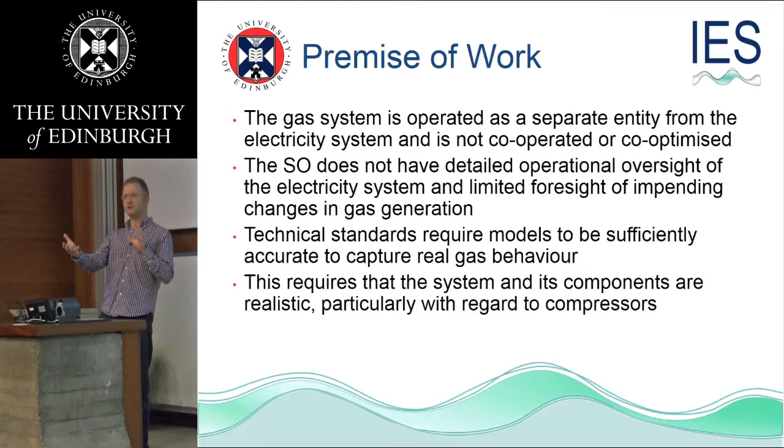And one of the interesting bits about that is, rather than modelling, say, a compressor, which is key to that, as a simple pressure raising device, you have to model the whole compressor. Okay, so that involves the various flow rate constraints, surge and choke. So there's some mechanical engineers going, I've heard of that. So it's a mechanical system. And so you need all of that information in your model.

And another aspect of this is that gas systems have quite a slow time constant. Electricity systems, it's almost instantaneous. In gas, it takes time to physically move the gas from one end of a pipe to another. So there's quite a slow pattern to this. So the way that the gas companies operate their system is they employ something called transient analysis, which actually factors in the full mechanical flows of gas down the line.

So it takes in momentum, energy, mass transfer. And that's a pretty challenging thing. In addition, one of the advantages of the gas system is you have some inbuilt storage in the form of line pack, and that's basically an ability to squeeze a bit more gas into the pipe than you normally would and then draw it down a bit. So it basically gives you a buffer, a pressure buffer to swing between, and that's used extensively in operation.

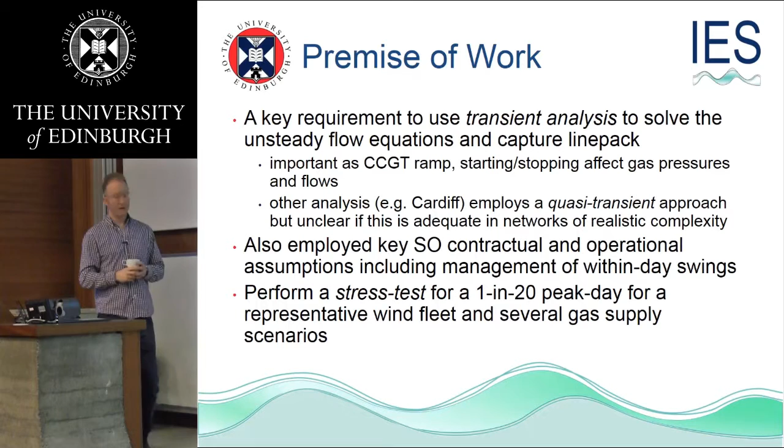And the reason the transient analysis is important is because if you're talking about a system where you're ramping generation up and down in response to wind, then you're actually talking about potentially quite big swings in gas flows and gas pressures during the day in response to wind.

Now, some other work, particularly in Cardiff, has had a sort of quasi-transient, so essentially a series of steady-state models which they claim do this. I've never actually seen any analysis to see whether that's actually true. So there's still, I think, an assertion about whether that's realistic. Certainly, in terms of realistic complexity, I don't think, other than National Grid, anybody has ever tried to do this at the scale that we did.

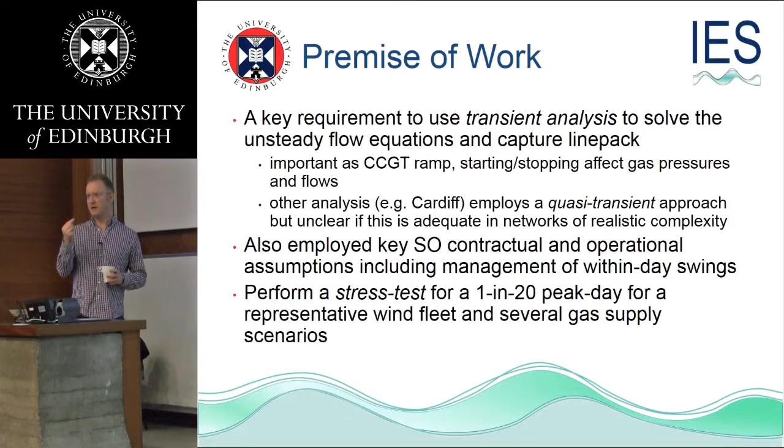So one of the bits of the analysis as well, we were very interested in the contractual arrangements that the system operator has, and a lot of that is about defined pressures in the gas system that they must maintain. So the way that James thought about doing this was, he was very interested in the peak stress days. So that's the very cold days, probably like today, where you've got relatively still, very cold temperatures, high heating demand.

Well, that doesn't apply here.

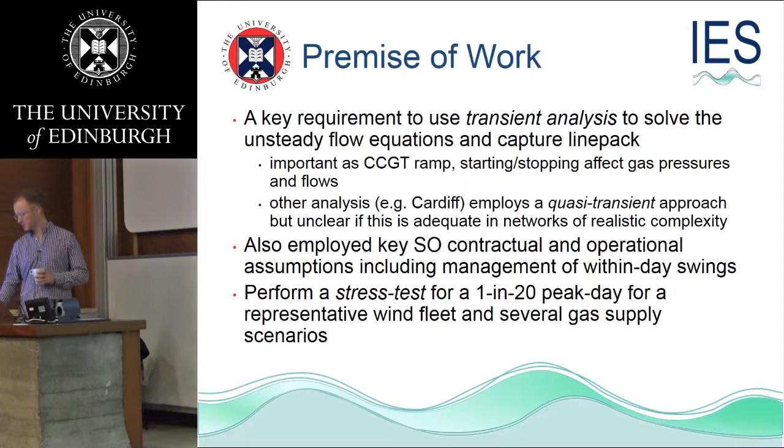And then looking at, in those high demand days, what does wind do to the system? So there are a series of different scenarios of supply applied, and then a series of bits of analysis carried out on each of those. So the working principle here is that, fundamentally, the gas system operator cannot anticipate a change in CCGT operation as a result of wind. And its working assumption is that the demand for the day is flat. Okay? And in practice, it's not, but that's how it's done.

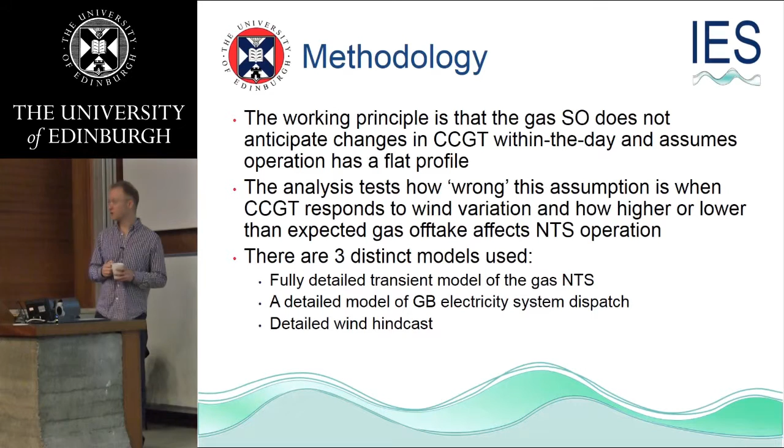So what this analysis did was test just how wrong that assumption was, and also whether or not the response of CCGT to wind would result in higher or lower off-takes of gas and higher or lower pressures. So to actually figure that out, there were a range of different models applied, and there was a fully detailed transient model of the national transmission system, a relatively detailed model of the British electricity system, and then a detailed wind hindcast applied in a sequence. So I'll pick up a little bit about those.

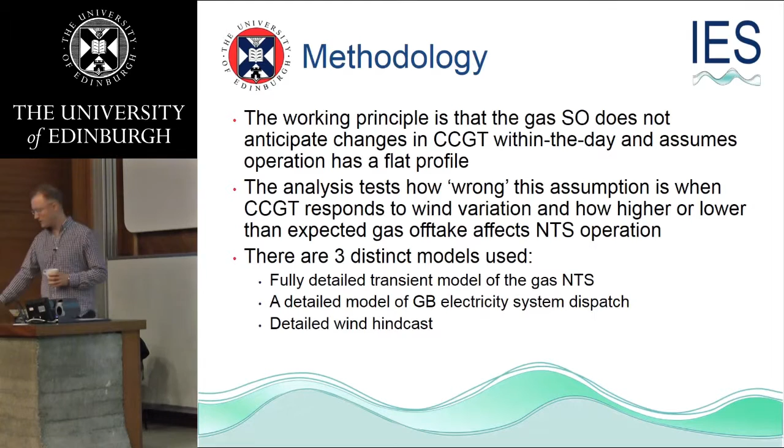So the first bit I'll pick up is the wind model, and that comes out of the work of Sam Hawkins, and that model is available for anybody to use should they wish. And it's a relatively long 11-year time series, down to about 3 kilometres on an hourly basis, and it does a reasonably good job at simulating both wind speeds and the wider fleet. Relatively low bias on that. So with this particular example, there was a fleet of something like 13 gigawatts onshore and 19 offshore. So something like 32 gigawatts overall. So it's a pretty big wind installation, substantially bigger than today.

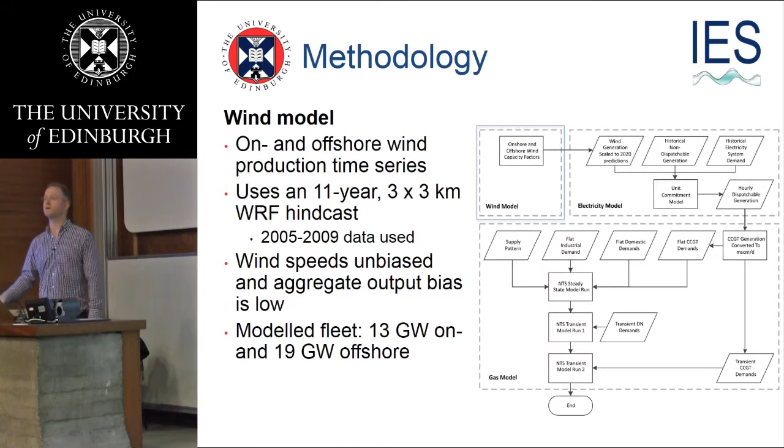So the idea here was that you had a wind model, an electricity model, and then a gas model. So the wind model basically sets a series of boundary conditions for the electricity model, and the electricity model essentially dispatches the system as it sees fit. And it uses something called a unit commitment model, so it tries to do it efficiently and as cheaply as possible, but it also tries to capture the requirements for generation to be up for a certain amount of time, down for a certain amount of time, and their ability to ramp between different states.

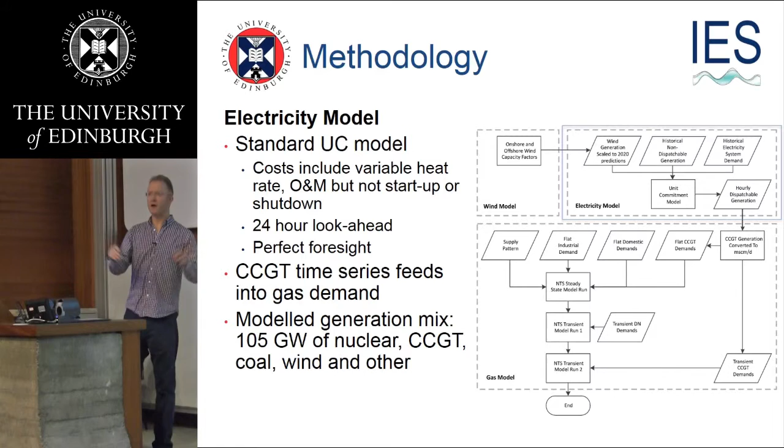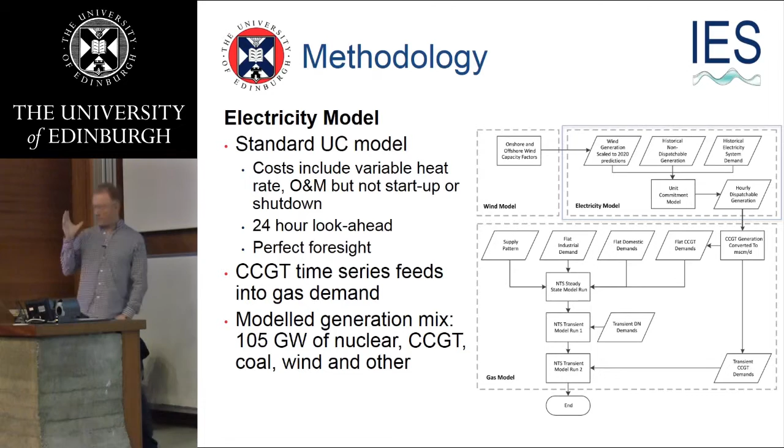So it's reasonably realistic. It had a rolling profile, so it looked 24 hours ahead, and it assumed that the dispatch was perfect. Okay, it had perfect knowledge. And that translates into a dispatch pattern for each CCGT, and that then sets its gas demand for the day. And that was in a context of quite a large mixed fleet of renewables, nuclear, gas and coal. And that basically sets the boundary conditions for the gas system.

And here's a bit of colour, here's a picture, which is great. So this is a very big system. Most of the models you see in literature are talking about 30 nodes. Okay, this one is 800 nodes, so it's 10 times larger and many, many times more complex. It also contains a whole range of things in addition to pipes.

Regulators, which basically will control flows or pressure, a set of valves which give you on-off, and also quite a large number of compressors. So this is a pretty challenging problem to solve even at the base level. And the software that we used was something called Graphical Falcon, which was National Grid's then default package. It's still used by a number of the distribution companies.

The problem with it is it requires manual operation. So there's no automation, there's no optimization, and it's somebody sitting there and figuring out how to get gas from here, here, and here to there, and there. Okay, so it's pretty challenging to use, and highly iterative, takes quite a long time, and it's quite skilled. So, the aim here, and certainly by the time that James was doing this analysis, he was working for National Grid, so he was reasonably skilled at using it. So I think it approximates what the system operator would do in those circumstances.

So the sort of things that you were having to deal with there were high and low pressures, intakes and offtakes. The offtakes are sort of distribution systems, maintaining differential pressures across different parts of equipment, the whole of the envelope of the compressors, and what you were looking there were essentially soft limits on the line pack. There was a sort of target amount, as well as some sort of reserve. So if you get it wrong, there's a bit that you can either draw extra gas or push the gas somewhere else. So they were just sort of operating margins of the system.

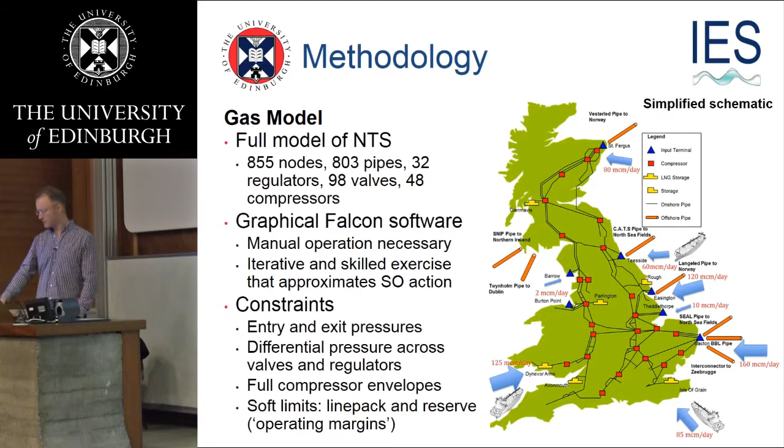And there were 3 runs in this. That's why this diagram is so complicated. So basically, it takes the gas from the CCGT, and the first run, it assumes that everything's nice and fixed. The demand and the gas are fixed over the day. It gives you an initial starting condition. The next thing is it starts to look at varying demand, and the idea here is you run this across the day and you try and set up the system so that it can do that. And what it does is it gives you a base level for the line pack, so a high to low pressure swing that's big enough to meet the needs of the demand.

After that, you bring in the variable CCGT, and then essentially it's overlaid on top of that. And the difference between those 2 transient runs is basically a measure of the operational uncertainty that the system operator faces, and it indicates the extent of the changes that need to be made to accommodate the wind on any given day.

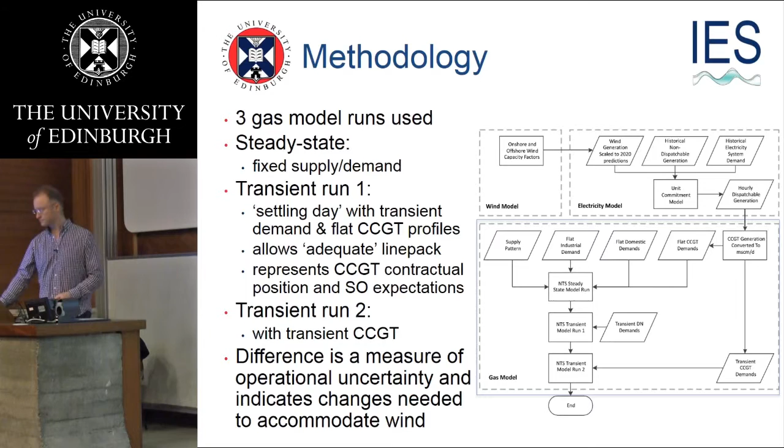So as I said before, it's an iterative process. It involves you sitting in front of the computer screen and trying to set the requirements for pressure and flows, and the system will tell you whether or not you're going to get it right. So there's a series of alarms that will scream at you if the pressures are too high or too low, the flows are too high or too low, you're in and out of your compressor envelope.

So in a broad sense, it's not optimal in a mathematical sense, okay, but it's close-ish, we hope, to what goes on in reality. So the idea here was you end up with a strategy for a particular setup that's credible, that is feasible in terms of the various flow and pressure constraints, and then if that works, you try and minimise the use of compression. If it doesn't work, that's deemed to be a sort of failure of the underlying system, and then that will force the system operator, in this case the proxy, James, to play about with bringing in additional resources, the operating margins, to try and make up for that.

So in practice, if you have done all that and you still can't get it to work, then you've got a problem. And what National Grid do in reality is they will then go back to the market and say, we'd like somebody to turn their demand down, please. And if that doesn't work, then they start manually turning people off. So there's a sort of sequence of events there that kind of mimics what goes on in reality.

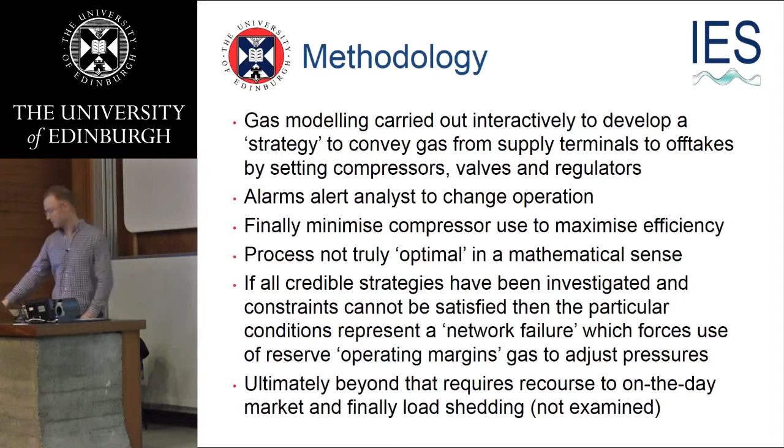So the series of scenarios tested, and what they did was they looked at different patterns of inflow. So there are a whole range of terminals around the UK, from the continental shelf, liquid natural gas, and so on. And these different scenarios looked at different combinations of those, as well as how much they had in storage.

So there were 5 years of wind that were used for this, and that was run through the unit commitment model to give a series of dispatch patterns for CCGT. And because the gas system is a manual system, it's not possible for us to look at the 5 years in total. So the 10 worst days were pulled out of that, and they were run through the gas model in the way described.

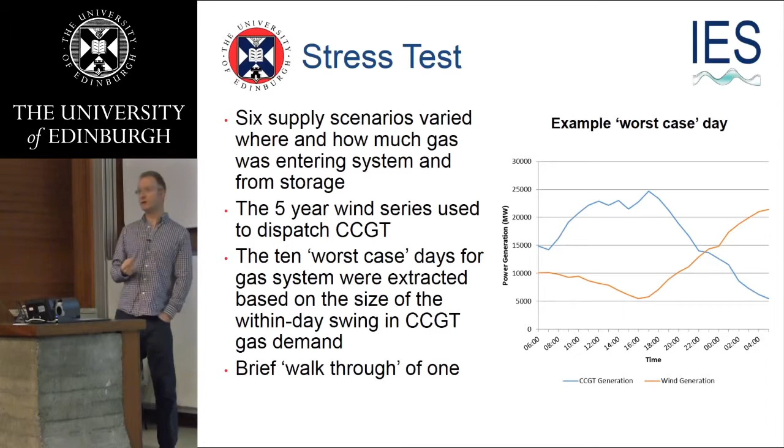The worst days were described as things which had the largest swing in gas demand for the CCGT. Okay, so that was quite different patterns, but essentially what they were doing was if the wind blew harder or less hard at particular times of the day, you would see swings in the CCGT above and beyond what would naturally happen. So we're going to take you briefly through one of these rather than the 10.

So this is an example where you have quite an unusually low flow in this terminal here, the Easington terminal, and that's where the Langeled pipeline comes in from Norway. And that's an interesting setup because a lot of the CCGT in Britain is in the vicinity of that terminal. Now, for this particular situation, we had a wind day which saw wind initially quite high, and then it started to fall and then picking up again. So the gas day is usually 6 to 6. It's now 5 to 5 in the morning.

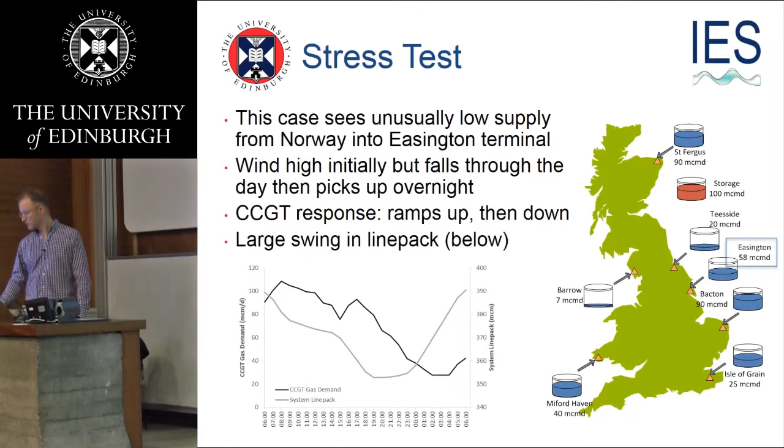And what happened in this particular case was that the CCGT response was initially to ramp up and then ramp down in the day. And that was quite an unusual occurrence. And it resulted in quite a large swing in line pack. So this grey curve here is the line pack. What National Grid try and do is have something where the line pack pressure moves plus or minus 10 million cubic meters of gas a day. So here we can see that the variation is something approaching 40, from top to bottom, so plus or minus 20. So it's about twice what they would expect at present. So that in itself was interesting.

And what was done in this case was a systematic attempt to repressurize the system, changing some of the compressors around, first of all, in this area, and then systematically working north so that you could try and bring more gas from the northeast and then from Scotland. Interestingly, that didn't actually help. And part of the reason for that is the greater the distance you transport the gas, the bigger the drop in pressure. Okay, so you've actually got a problem there.

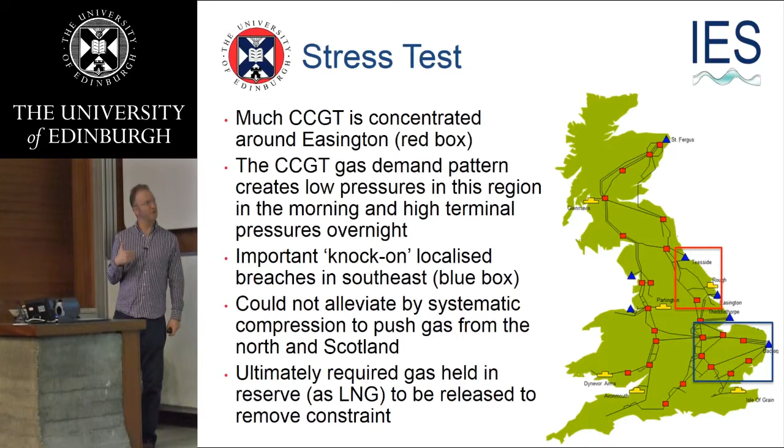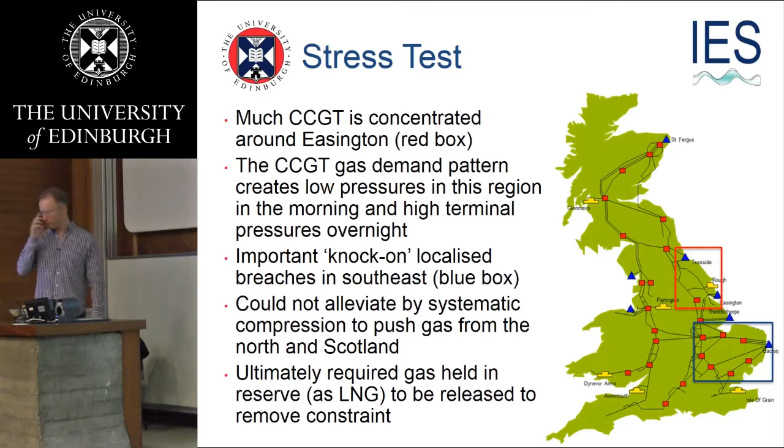And what that required you to do ultimately was release gas from this location down here, the Isle of Grain, either by keeping the gas in place later on in the day, but releasing some extra gas early in the morning. So, it was actually quite a small amount that was needed relative to the overall breach. And that managed to bring the system back into balance.

Across the wider scenarios, the whole range of those, the worst case tended to vary between those ones. So in a lot of cases we were basically looking for stress situations, for example, lower than expected flow into St Fergus, or lower than expected flow into Milford Haven, and so on. What we tended to find is there were quite big differences regionally depending on the situation, and also depending on which kind of swing you got, the timing of that. You tended to get either over or under pressures earlier or later in the day.

Now the ones where you had problems north to south, they tended to be less serious. Okay, so if you reduce the flow a little bit from St Fergus, it had less of an impact than if you reduce the flow east to west. And the reason for that, if you look at the pattern here, and this is heavily simplified, is that the pipelines tend to go north to south simply because the dominant source of gas in Britain has come from the North Sea through the St Fergus terminal. So coming north to south, it can handle it. But anything where you're changing it east-west, it had more of a problem.

And I think that's something that's quite realistic in the sense that National Grid struggle where they get ships being diverted based on the price of liquid natural gas, because they're expecting something and they don't get it. So in all cases, we found that the wind patterns tended to increase the swing in pressure, the line pack, in all cases. And in the vast majority, you needed to have some sort of top-up intervention as a result of that.

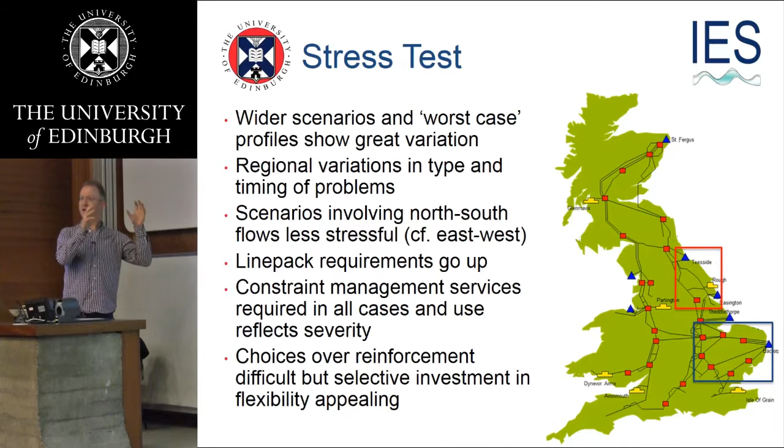But certainly additional flexibility in the gas system would have knock-on benefits for the electricity system. The challenge with that is regulatory; in regulatory terms, that's not possible because they're two separate systems, okay? Which is annoying. So what we were able to glean from this was that if you want to do things which the utilities will believe, you need to use models which they will believe. So this is one such model.

Very, very hard to use that efficiently. Certainly in this particular case, it was probably quite extreme. One of the things that does come out of this is that compared to some of the other work with simplified models, we see things in here which we don't see in their models. And the reason for that, we think, is the oversimplification of those models leads you to basically miss important aspects. But certainly the uncertainty is an area which is really quite important to the gas systems, and it's becoming quite an important aspect of their work.

One of the things that's alluded to in a lot of other work is actually if you gave the gas system some operational oversight of the electricity system or vice versa, then you would get some benefits from that, some synergies, and that would be, I think, quite valuable. How that happens is a different matter. And to some extent, this work, I think, raised as many questions as it actually answered. It certainly has been on my mind a lot over the last couple of years, as we've noticed that more and more of our work has been about interconnection of different systems.